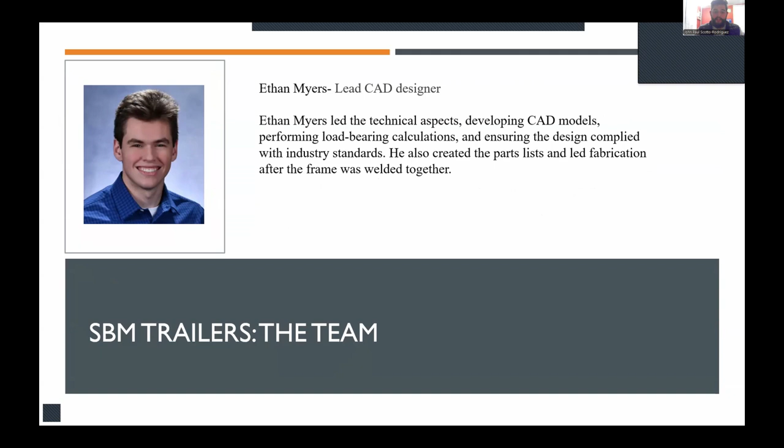Hi, my name is Taylor B. I'm going to be going over our project identity and purpose. First thing is that we initially wanted to develop a 53-foot trailer. This is because that's what's standard and that's what gets used on farms for transporting hay. The primary objective for this was to make it self-loading so that farmers could eliminate the use of multiple equipment and be able to consolidate into one single trailer.

Our initial focus was on small 60-pound bales. The reason for this is because that's what our primary customer uses. Additionally, this allows us adaptability into a bigger, larger array of bales. So the design here stressed simplicity, safety, durability, and ease of maintenance.

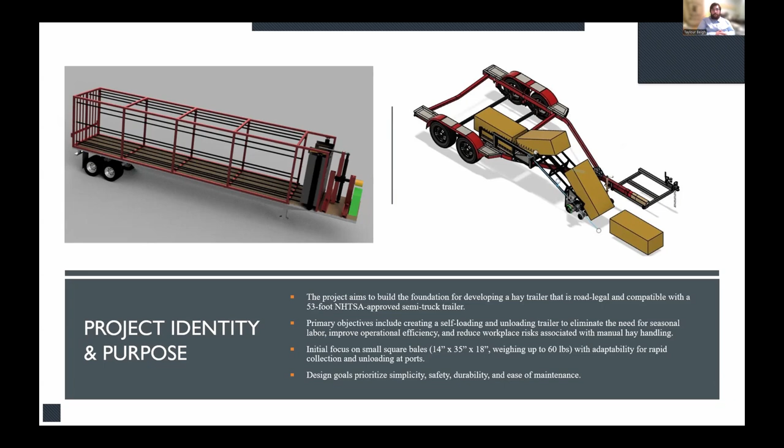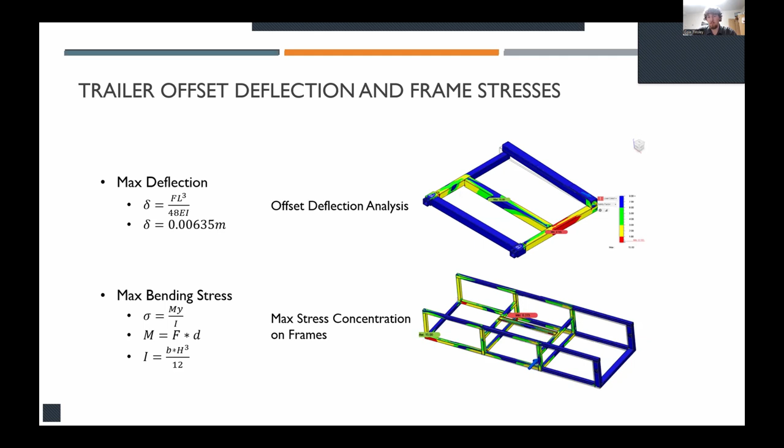This is just a basic outline of how each component was analyzed: maximum deflection to ensure nothing goes too far beyond our bounds, maximum bending stress, and normal stress. These are the basics of how we analyzed each part and what we needed each part to do.

Risk management: especially our initial design parameters were a little beyond what our means were, cost-wise, weight-wise, moving parts from place to place, and having a larger trailer was a bit beyond what we could do for this project. In complexity, especially in terms of features, we ran into time and delays because we couldn't get a solid prototype design laid out. The solutions: funding brochures were made by Scotto, who networked with people he knew so we could get some costs handled and not reduce our scale and size too much, though we did have to reduce them pretty significantly from our initial design perspective.

So we ended up with two designs, more or less: one for a full-scale commercial idea, and one for the prototype we're doing for our project, which should serve as a proof of concept for those later ideas. We came up with the prototype design collaboratively, figuring out what needed to be on there and what didn't, so we could keep it within the scope we could handle.

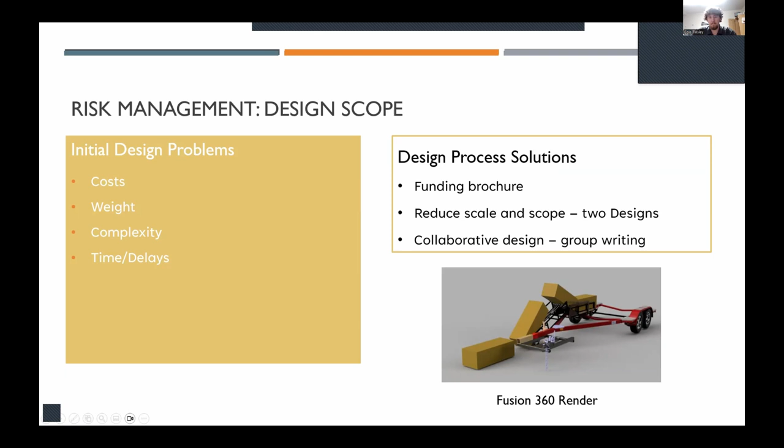For risk management, we also had to take into consideration liability and making sure everything was safe enough that even just constructing and operating the prototype was within certain bounds of safety. So warning labels, road security, getting it from place to place, DOT codes, making sure it's all within the bounds of what we can do.

For current concerns, that refers to the prototype problems: travel, making sure everything's secure when getting it from place to place, and making sure the project functions safely. Future concerns have to do with a full-scale idea we haven't fully fleshed out: full load travel, security and legality, labeling, a lot more to consider for a larger scaled thing that could be commercialized.

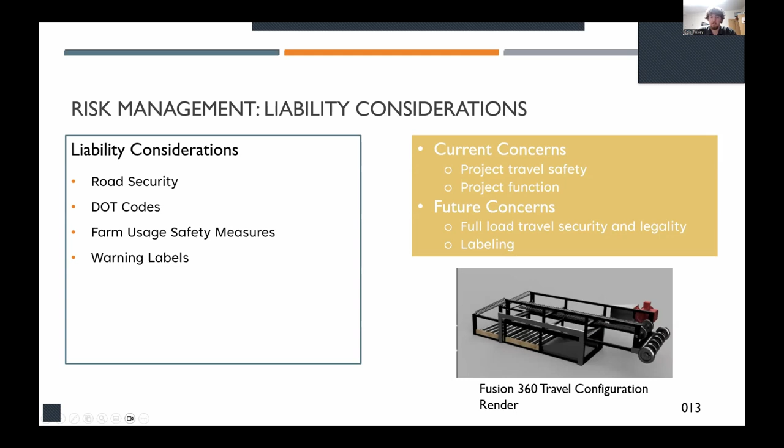Here are some of the codes key in designing our prototype and relevant to our project. Max trailer widths in Washington via the Washington Administrative Code is 102 inches across. Max trailer load, since our prototype is connected to what was a boat trailer, we're basing it on a class 1 boat trailer at 2,000 pounds maximum, which we associate through the GVWR rating system. For trailer connections and safety systems, the ISO standards, the International Organization for Standardization, have a lot of good resources for ensuring our safety system, design principles, and agricultural machinery are all within the bounds of what we needed to handle.

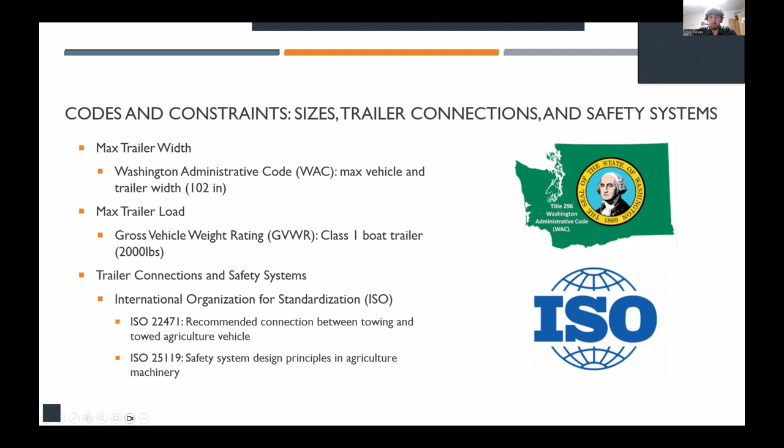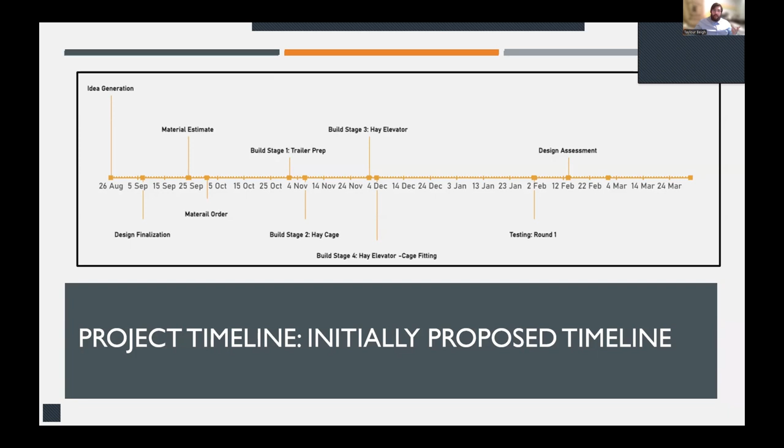What we can see here is that our initial idea happened around August, and we hoped to have our materials ordered in October before the end of the year, start building, and then start to test around early in the year, February or so. But unfortunately it wasn't the case that we were able to maintain that schedule.

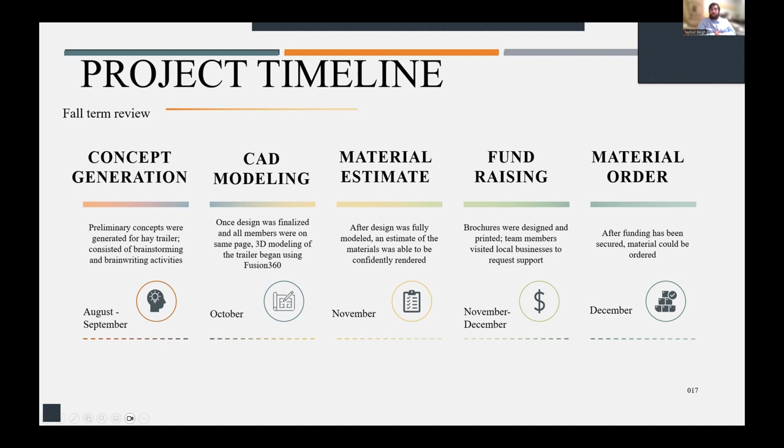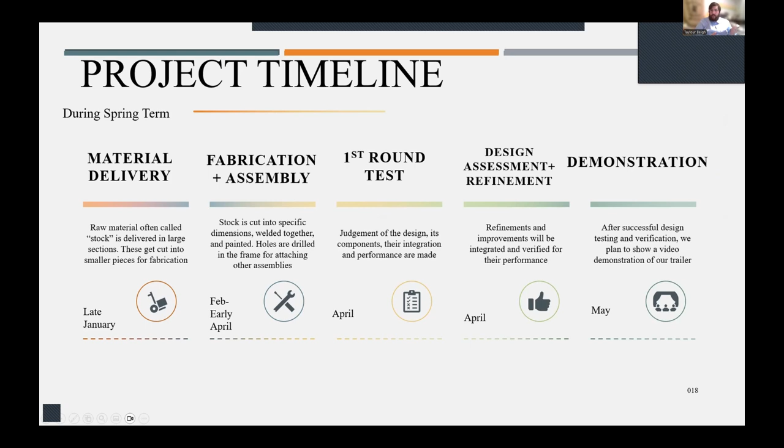Alright, this is Ethan here. I'm going to go over the budget.

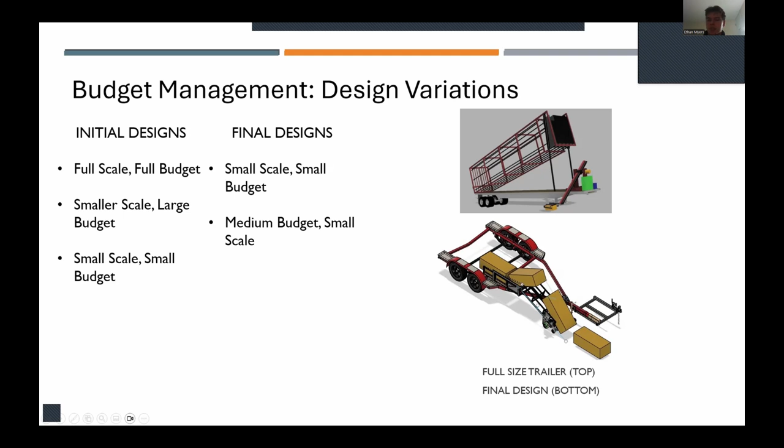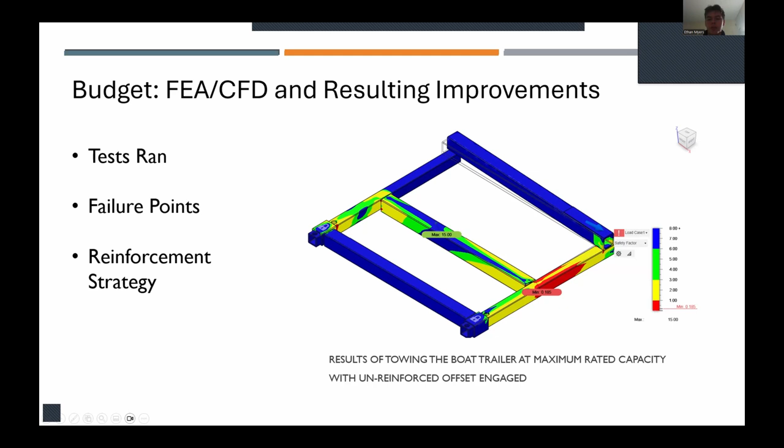We also had a few reinforcements where we went up to bigger shaft sizes or bigger bolts here and there, just in case something went wrong, and it was only a few more dollars for maybe a 100% increase in strength in a few places. Next slide please, Taylor.

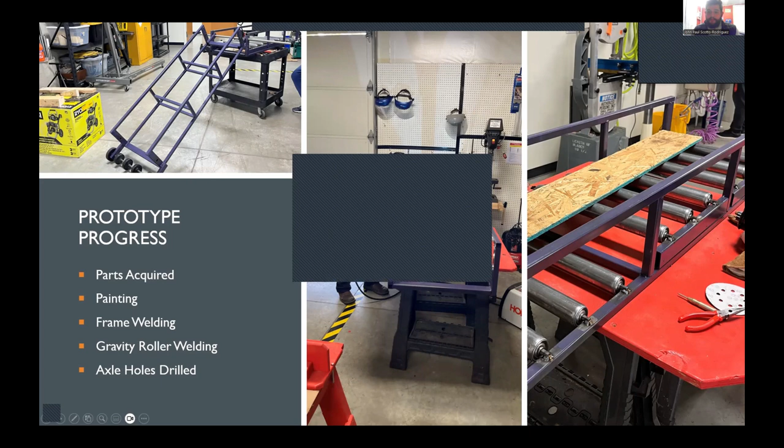In these above images, we have the parts acquired, painting, the frame welding, the gravity roller welding, along with the axle holes drilled. Also in the above image on the top left, we also had to hone out all the holes for the wheels. These images show Taylor B welding all the gravity rollers on.